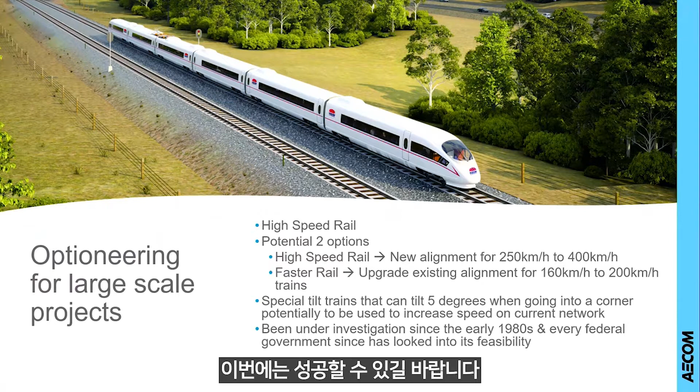The other option is faster rail, upgrading the existing alignment from 160k to 200k, which is likely the most interesting option. We're going to have special trains that will tilt more than 5 degrees in certain areas just to keep the speed. This project is a long life project - they've been talking about it since the 80s. Hopefully now it's going to go through.

So that's the picture of the workflow. Don't worry about that, I have a zoom of this workflow. If you take a look at the workflow, the idea is that we start from GIS data - we gather GIS data of the territory from the GIS guy.

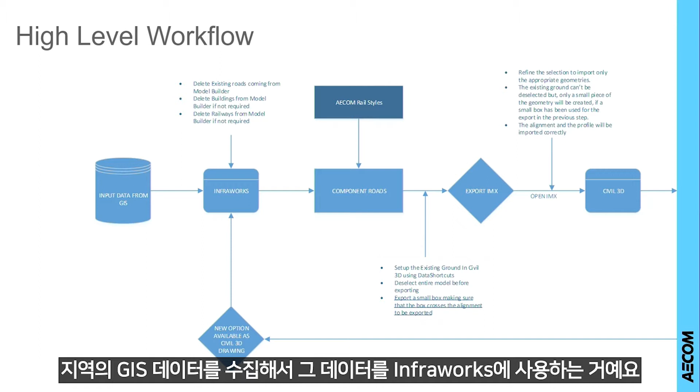Then we use that data in InfraWorks, using component roads in InfraWorks to fake the rails, because there's no rails in InfraWorks - well, we do have rails, but they are not component rails. So we developed some custom styles using custom components, but really we are faking a rail using a road.

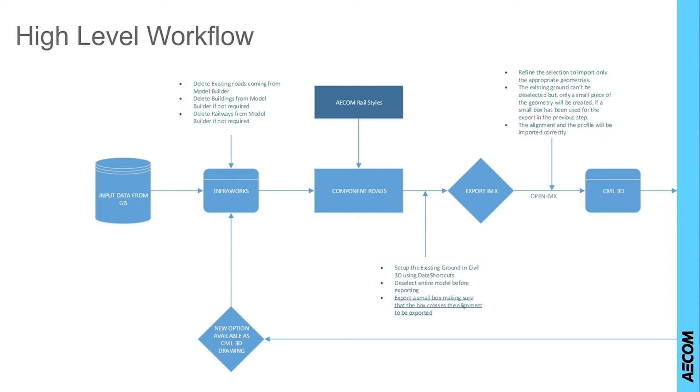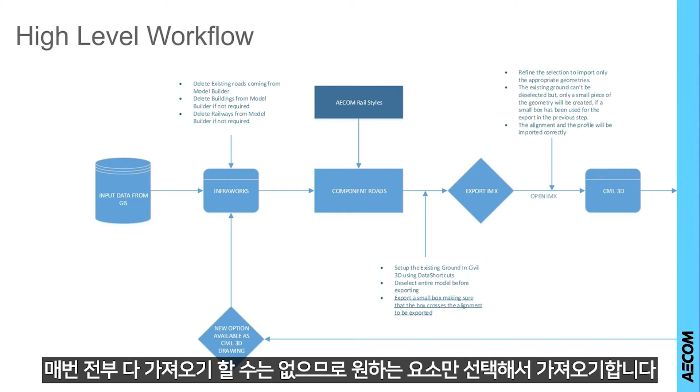Then we export that into an IMX. We've got custom templates based on customer requirements in Civil 3D that we use to import the IMX and quickly shape the look and feel of the drawings. Then we refine the selection of elements we want to import inside Civil 3D - we don't really want to import everything every time. So that's what we do when we open the IMX in Civil 3D.

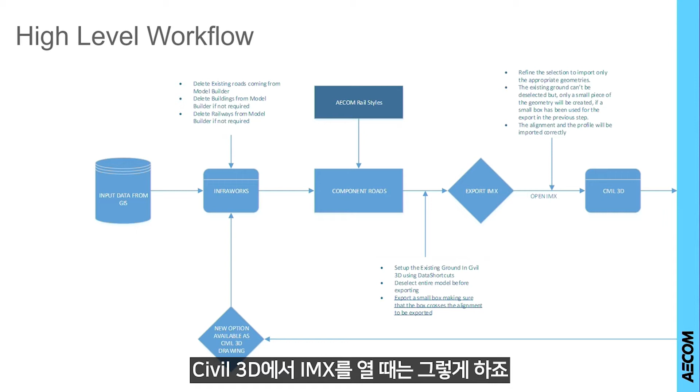And then, of course, when we are in Civil 3D, we start to leverage the power of data shortcuts to keep things lighter and at the same time dynamically connected. So we usually have a file with the geometries - alignments and profiles. Then we have another file with surfaces, another file with the corridors, and another file with the sheets.

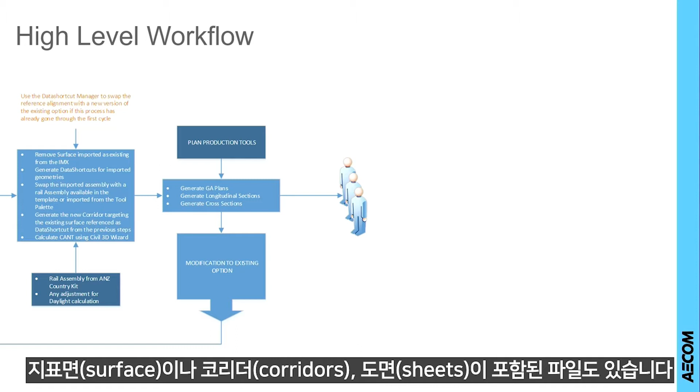So we try to keep things as much as possible separate. Also, because if we want to change something in the project, we don't want to open a file and wait for 20 minutes for the file to open.

In large data sets, you'll find that Civil 3D is creating also a local proxy geometry - if the file is more than 2 gigabytes, Civil 3D creates a local geometry. So every time you want to refresh that geometry, it's just a nightmare. And if that file is sitting in ProjectWise, it's even worse, because it's going to pull all the information from ProjectWise, and you literally wait 20 minutes before the drawing opens.

But we try to minimize this issue by splitting the model as much as possible, finding a tangent point, for example, where we can split the model on a straight stretch, both vertical and horizontal. Then at that point we start another one. We found that more or less 7 kilometers is the right range in Civil 3D to keep things pretty good. This project is 240K, so you can multiply the number of models, drawings, and things we have to keep track of - but they work. At the end of the day, they work, so that's good.

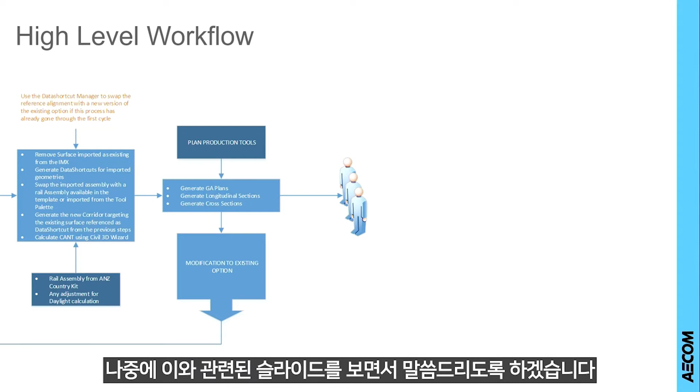You probably heard about this - the data shortcuts can sit in BIM 360. I have a slide, I'll talk about that a bit later.

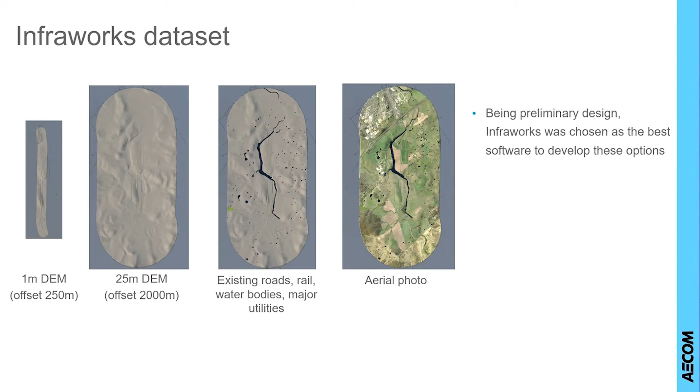So that's more or less where we start. As I said, we gather information from the GIS guy, trying to have different... we asked the GIS guy to provide us with different DEMs, some of them at 1 meter, very close to the alignment. 250 meters is the buffer we usually use for the 1 meter resolution. Up to 2 kilometers, we use 25 meters. And then we gather all the information about the water area, and also the aerial information.

So we have different options at AECOM - we have an enterprise business agreement with Bentley and Autodesk at the same time. Of course, we also looked at Concept Station, which is the same product coming from Bentley. I have to say that at the moment, the majority of the geometry design is done in Bentley. We're trying to shift this to an Autodesk solution, but the designers still prefer MX internally to do the geometry design. So we chose to use InfraWorks in this project just to demonstrate that we can do it.

We already had a GIS portal where we have all the client information, so we used that to gather all the information we need.

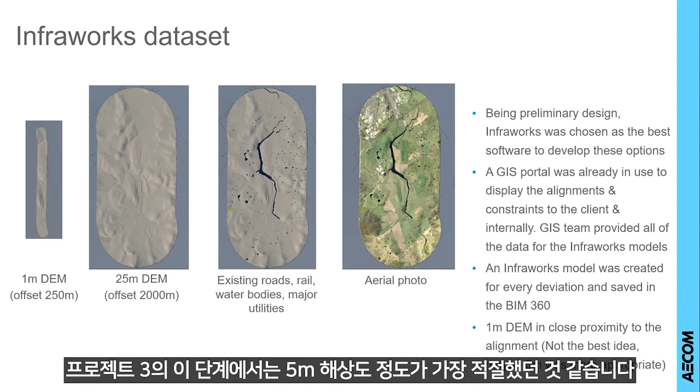An InfraWorks model was created and published to BIM 360 just to share the information with the client, literally in real time. At the end of the project, as a lesson learned, we understood that probably 1 meter is too much, it kept the file really high, really big and heavy. Probably 5 meters was most appropriate for this phase of the project. So that's good, this is the good guy.

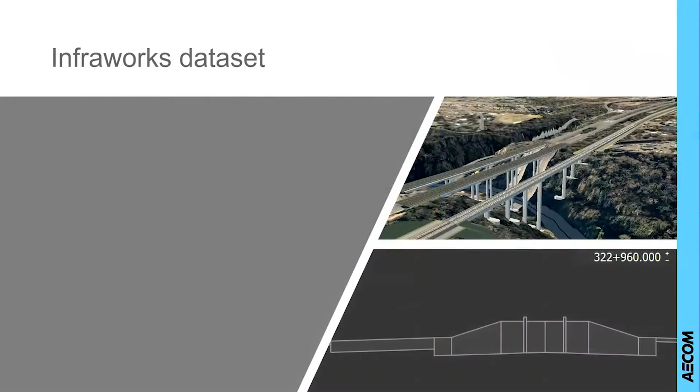So the InfraWorks dataset, this one is exactly the example of the component roads used for the rail design. Generally it's very easy to use InfraWorks. We have internal trainings that run for probably 2 days, the basic one, so people can start to use InfraWorks very quickly. They look pretty, so it's a very nice visualization in just a couple of hours.

The bridges are really powerful in InfraWorks, and our bridge engineers are starting now to use the bridge design inside InfraWorks as a very quick optioneering. Again, we have the option in Bentley, but we just like the way InfraWorks is doing it.

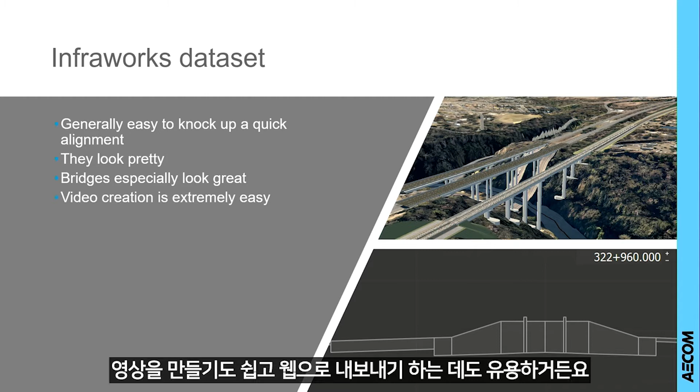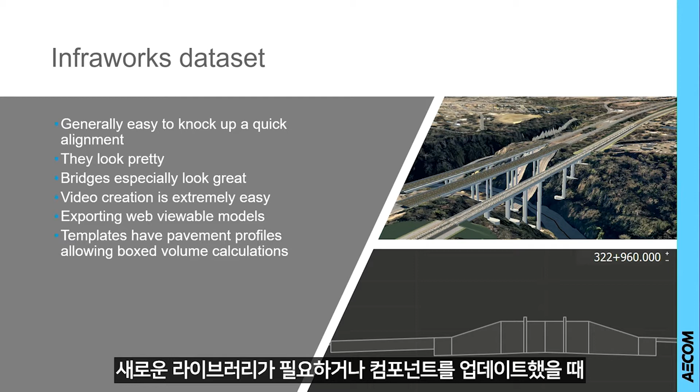It's very easy to create video, and it's very useful to be able to export that to web. Then we can push to the designers whenever we need a new library or we update the library of components. We just push it through the night, during the night, to all the designers so they can get it the day after. So that's good.

But now comes the bad. The speed — we found that InfraWorks sometimes is really slow. To be able to use a large dataset, you have to really tweak things as much as possible.

So we had to split not only the Civil 3D models, but we had to split the InfraWorks model as well. So we had probably about 50 different InfraWorks models connected to different projects in Civil 3D. That was the idea we found, and it is probably the best approach.

10 kilometers already started to struggle in InfraWorks, so you have to keep it less than 10 kilometers. It depends on the complexity, but more or less it's a rule of thumb.

We had a 30K option which we couldn't really split for design reasons, and that's my designer working on that model. It was literally crashing the computer every probably 20 minutes, so it was really angry.

We had to open the windows, even though we can't really do it because we are in a tower, because the CPU or fan were just burning the computer.

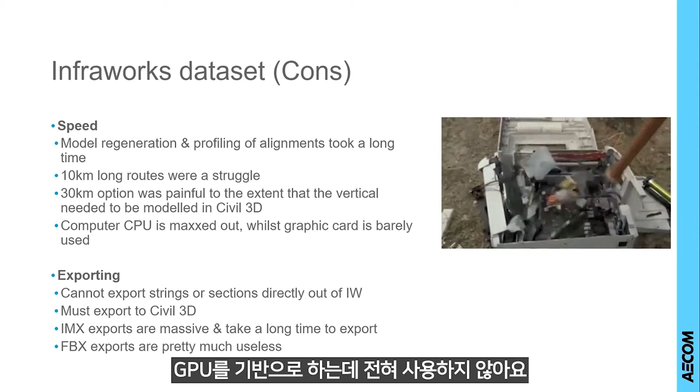Civil 3D, InfraWorks, it's card enabled, but doesn't use the card as much as we would like to. That's one of the biggest issues of InfraWorks. It's all based on GPU, but it doesn't use it at all. We don't know why, so we try to investigate that as well.

Exporting — we cannot really export sections from InfraWorks. It's not bidirectional yet between Civil 3D and InfraWorks. That's a big issue.

Sometimes we had to use FBX, which is just a stupid format. It's not a real BIM format, there's no information in the FBX. So sometimes we just decided to optioneer it directly in Civil 3D because of this reason. And the 30K, at the end, we just decided to move it into Civil 3D without using InfraWorks.

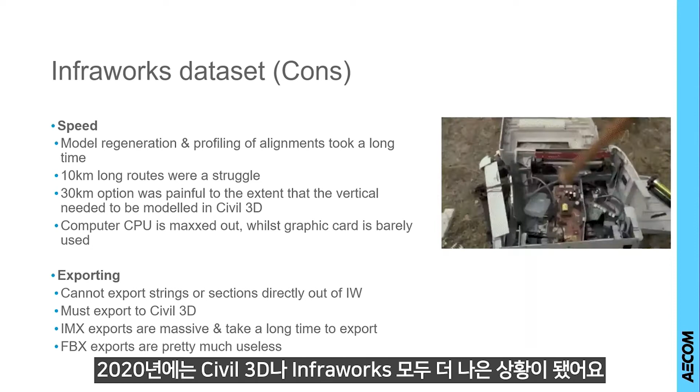Things are slightly better now — this is based on 2019, and 2020 is slightly better, both for Civil 3D and InfraWorks. So we're trying to give it a go again on the same project, and it seems to be going better now. That's bad, so for me, that's bad, really.

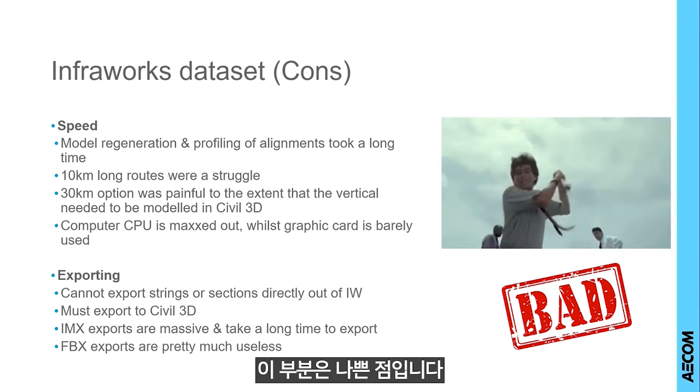So how to tweak the performance setup? I'll try to give you some tips and tricks. I don't know how familiar you are with InfraWorks, but there's a very nice feature here, this delayed road regeneration. We found if you tick that box, whenever you change the alignment both horizontally and vertically, it doesn't refresh immediately the road in 3D unless you click outside of the window.

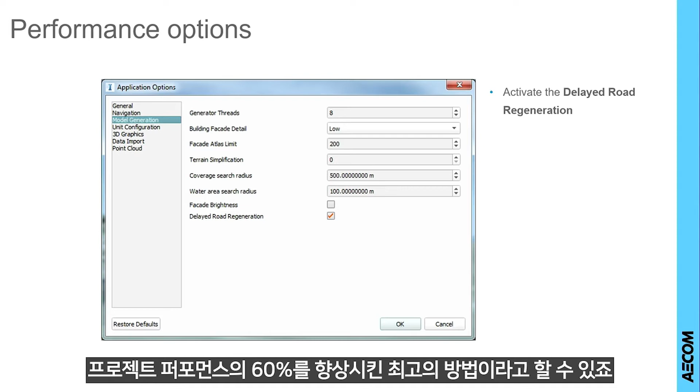That's good because the designer can tweak it in the profile view or the plan view, and then when he's happy with the option, he can click outside and regenerate the road. If you try to regenerate every time for 6 kilometers, 10 kilometers, 30K, it's just a nightmare. That's probably one of the best things we found to improve, by about 60%, the performance of a single project.

Make sure that you always use optimize for speed as an option, and if you have a GPU-enabled card, most of us will have probably an NVIDIA card, just make sure you add InfraWorks in the program settings as software that is GPU enabled. This will increase performance another 10 to 50% when you use the model. It still doesn't use the full GPU power, but it will increase the performance.

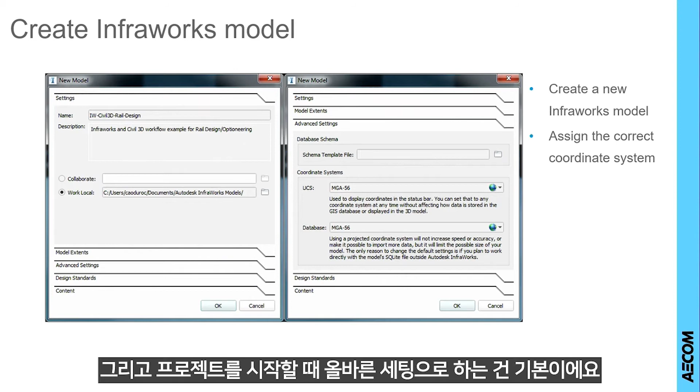You always start your project with the proper project setup. So how do we optioneer in InfraWorks? We import the raster image. I'll go quickly through this, you'll find it all, and I'll share the link to download everything plus the handout and everything else. So we import the raster image.

Then after we import the raster image, we quickly start optioneering with the options. The DEM will create the existing surface, and InfraWorks is very quick to do the optioneering part of the design. Unfortunately, we have to use the road because otherwise we don't have the rules to design the horizontal and vertical geometry if we want to use the rail, because it's not a component.

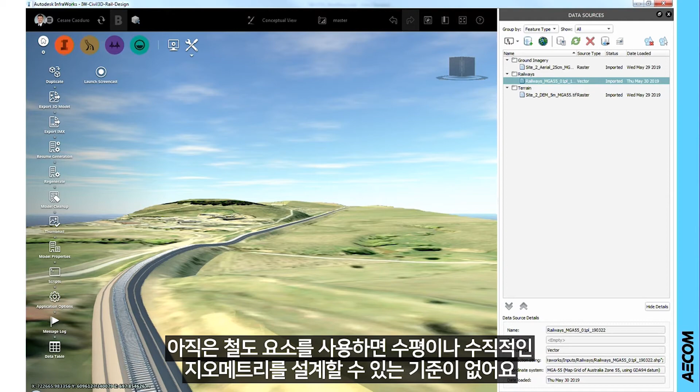So we go further. As I said, we have a couple of custom components which we push as a custom library. It's really simple: you create a shapefile in CAD, and that shapefile can become a component in InfraWorks for both the rails and the sleepers. Then we just create a simple texture that we apply on top. It's very quick and it works really well. We don't really need the full detailed 3D of the rail, we just need to show the client that it's a rail.

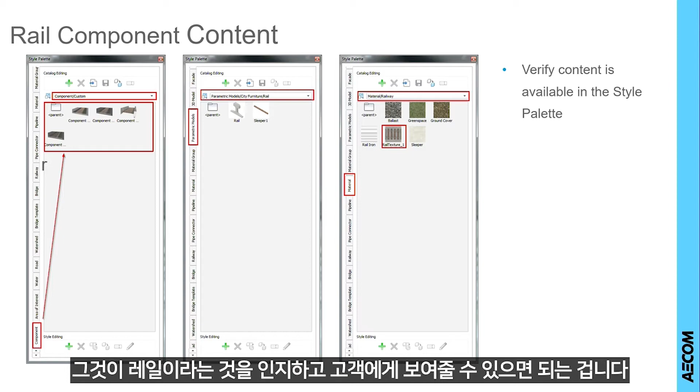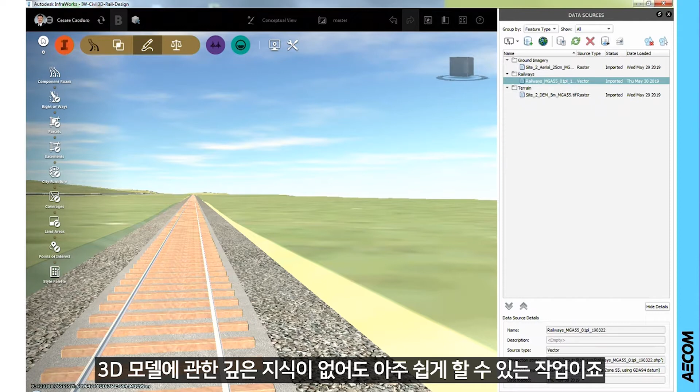It doesn't matter if it's a road, we like to fake things with the client. So then you can leverage the power, you can start optioneering using component roads to do that. You can start to input your dimensions, it's very, very easy to implement, and that's the final result. It's not very high level as you might expect, but this is done in probably less than an hour, so engineers can really go into that and do it without any knowledge about 3D modeling.

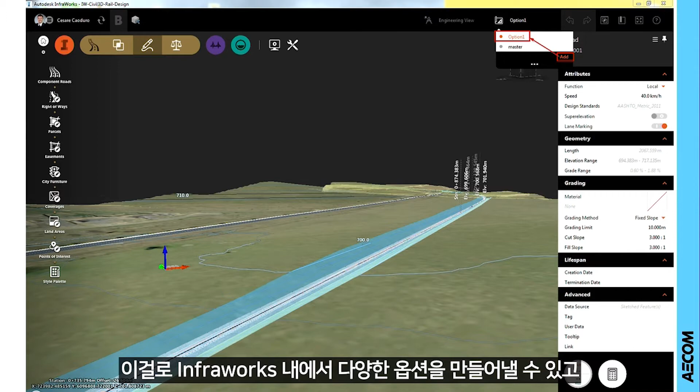Then you can show the profile view, and again you can start to do the vertical profile, which you can't do if you use the rail object. Using that, you create your different options inside InfraWorks, and then that's the time you go into Civil 3D.

So we've got RMS, Road and Maritime, and something else - government authorities in New South Wales - so we've got customized templates. The trick I want to give you here is that we use referencing templates inside the master template.

So how many of you know about referencing templates in Civil 3D? Okay, quite a few, but not everyone. That's probably the most powerful thing inside Civil 3D.

You can create a master template, and then create other templates on top of the master template, and just reference those templates like an XREF, like drawings, but it's a template. What you can do is swap templates whenever you want. So if you want to show the drainage, you have a template for drainage referenced in the master template, and whenever you want to show the pavement, you have a template for pavement, and you swap it. So you always have the same master model, but you swap just the initial template and start to produce drawings. You don't have to create different sets of drawings, you just create different sets of templates and swap them as you need.

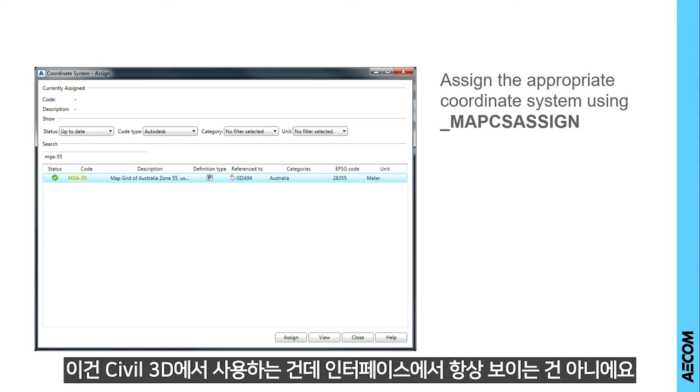Of course, you have to set the same coordinate system. We use this command in Civil 3D, it's just not always visible in the interface. I don't know why there's not a push button there to set the coordinate system, so we usually type this one in. I have it written on my desktop because I always forget - I had to Google it every time, so now I have a sticky note.

Then you start to set up your data shortcut profile. Until now, we used to set up the data shortcuts to point to ProjectWise, and I have to say that is a nightmare. It's a nightmare because ProjectWise is very slow in managing data shortcuts, and you can't use versioning control for them. We were pushing Autodesk for ages to introduce BIM 360 integration for data shortcuts, and thank God it's now available.

So you can set up your data shortcuts in your BIM 360 project, which is perfect. You can generate revisioning for data shortcuts. It's the same exact process you'd use for a desktop setup, but you set that up in a BIM 360 project using the desktop connector. If you have the desktop connector installed, you just find your network drive pointing to BIM 360, and then set up your data shortcuts on that.

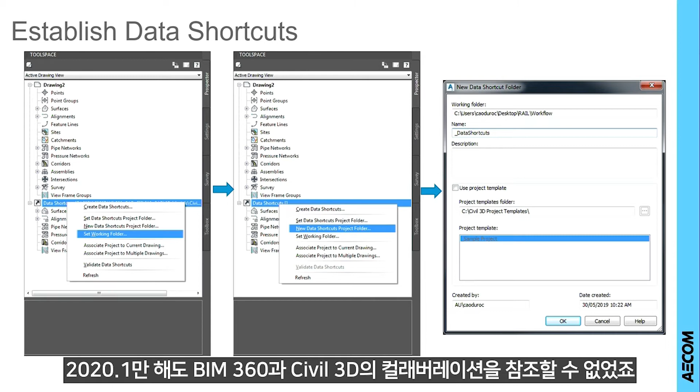Before that, even in 2020.1, it's not possible to reference BIM 360 collaboration for Civil 3D. So if you have an old project and want to use that, you unfortunately have to upgrade the project, which is not the case for most projects already started. But if you start a new project now, yes, you can do it.

We don't have a data center in Australia, so our closest data center is in the US. I found the performance still isn't quite good because we have to connect to the US. But if you're in EMEA or in the US, the performance is like writing on your desktop machine. That's another reason we can't really use BIM 360 too much for these projects - there's regulation about where the data is stored. If it's stored outside Australia, we can't use it for government or defense projects.

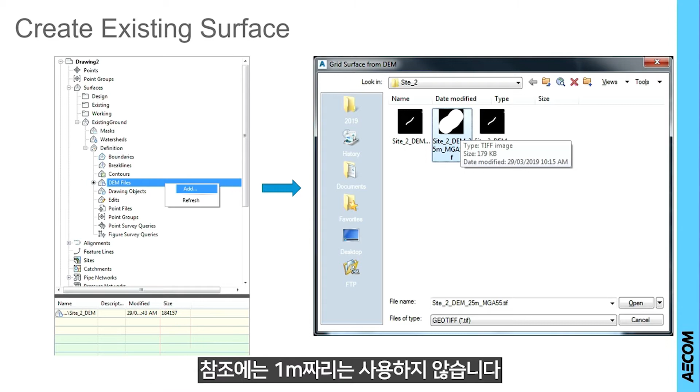But for internal optioneering, yes, we can do it. So we use this one to try to up-rev this project and understand what we can gain from it. Then, of course, you create the existing surface like you normally would, then reference the DEM file - the different DEM file depending on the type of information you want to gather. We usually don't use the 1 meter one if we just want a reference, and that's the kind of result you get.

Then we reference the aerial photo. The difference between a simple picture and GIS data is that you can't use an XREF - you have to use map insert because it's a GIS georeferenced image. You have to use map insert to be able to place the image exactly in its location. You can't really move that image because it's georeferenced.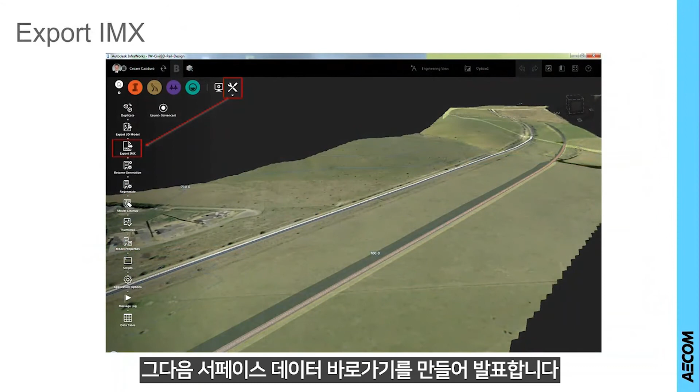So then you create the data shortcut for that surface, and that's published. You go back to InfraWorks and export the IMX. Of course, you don't want to export the entire project, just something specific. The trick here is you don't have to create a box for the whole area if you want to export the entire alignment - you can just create a small box, but make sure it crosses all the elements you want exported in the IMX. That creates a small box, so less calculation in terms of area, but because you crossed something, you'll still export the entire object at that time.

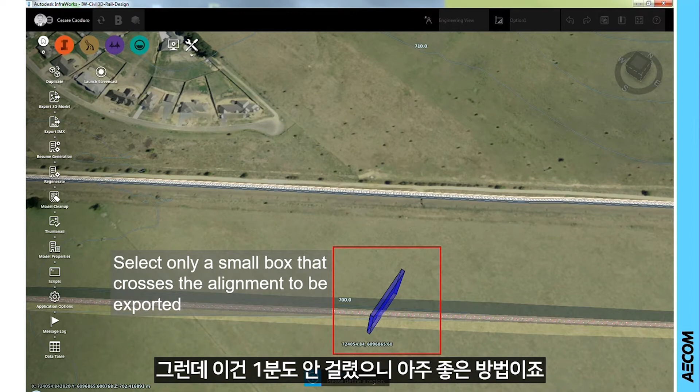This was a great improvement in terms of export, because at the beginning we were trying to export the entire area without using a box, or using a box for a very big area, and that took probably 10 minutes to prepare the model. With this trick, it's less than 1 minute - so it's a very good trick.

So you start then the Civil 3D production, importing the IMX inside the model that you just prepared. And you set the coordinates to match the InfraWorks one.

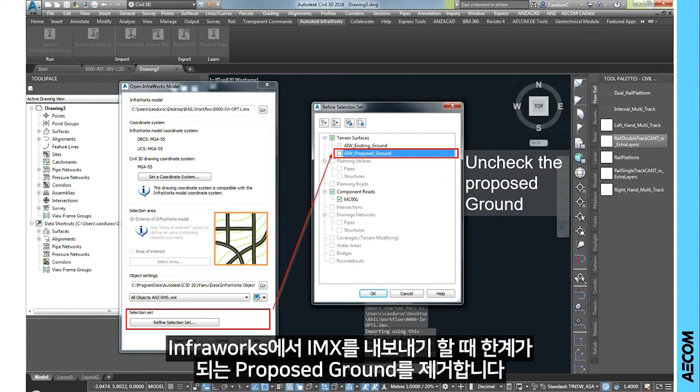And then you remove the proposed ground, because that's another limitation when you export the IMX from InfraWorks. You can't say, I don't want to export the ground. It will come up always even if you don't want to. So you always have to remove and uncheck this one every time you do it. They said they're going to fix it and give you the option to remove it when you export from InfraWorks, but at that time it wasn't available. Otherwise, it will just bring in again the surface that you have in InfraWorks, but you have that surface already created as a data shortcut in your model, so you don't really need it.

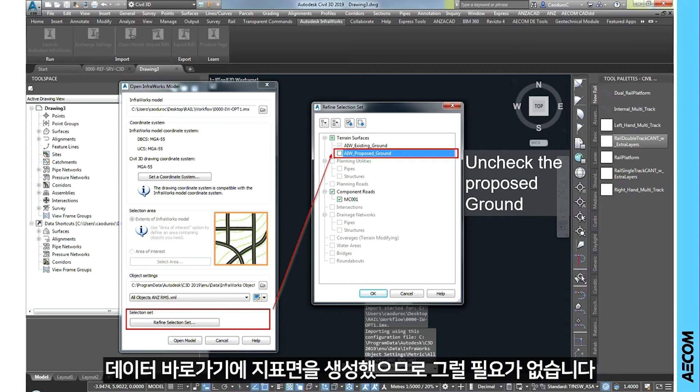So that's the result. It comes as an alignment. It comes with an assembly, which is the fake road corridor that we have created in InfraWorks. But that's not a rail, that's a road.

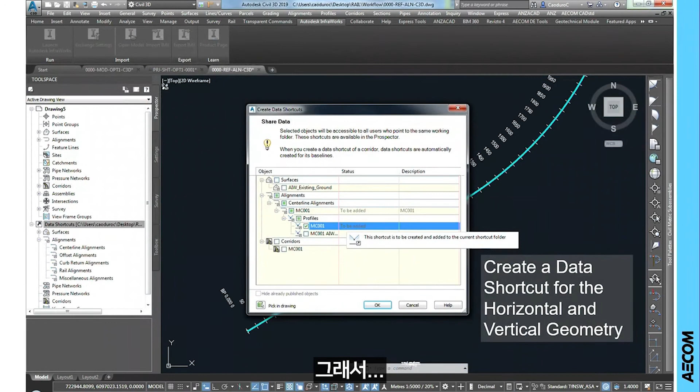So what we do, we create the data shortcuts for the alignment. We create a new drawing. And that's probably also another important thing in terms of performance. So when you reference a big surface inside another project, just make sure that you go under the settings before referencing that. You go under create surface reference, which is sitting under surface commands, create surface references, and make sure that you say you don't store the referenced surface in the drawing, but just keep it outside the drawing. That's another performance improvement when you have big projects.

That's yes by default, and it drives me nuts every time. So I actually created the template to remove that one. The out-of-the-box template comes with this one as a yes, so just remember to remove it from your template.

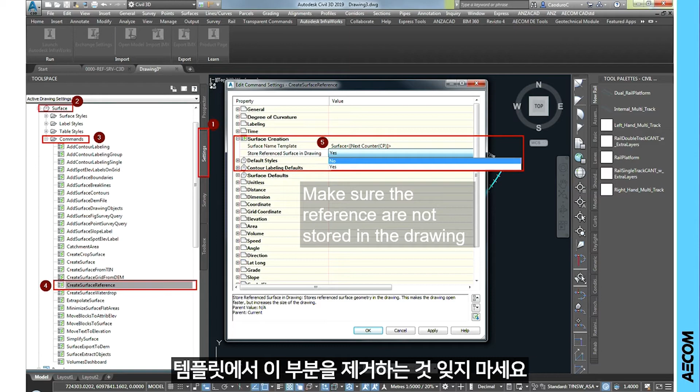So you reference the geometry, you reference the alignment, and then you start to create a new assembly, which is a rail now. But you can use the alignment by swapping the assembly. So you do a quick setup of the assembly.

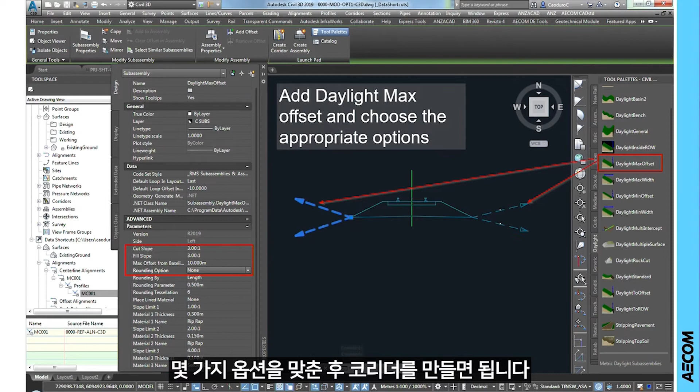It's already there out of the box. You just add the daylight, so the cut and fill for the cut and fill calculation. You do a couple of options there to match it, and then you create a corridor.

So you select the alignment, you select the profile. Both of them are coming from InfraWorks. You select the new rail assembly, and then you rebuild the corridor. And boom, that's the result.

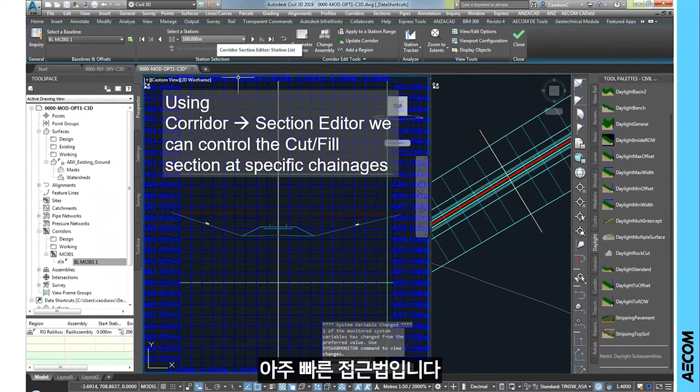So this one takes from the moment you draft in InfraWorks to the moment that you have this one, literally probably less than 10 minutes. So you can script this with a plugin if you want, but even with a couple of clicks, it's really easy because we already have this in the library, in the tool palette. So it's just a matter of creating the data shortcuts the first time and then just swapping the assembly. It's really, really, really fast as an approach.

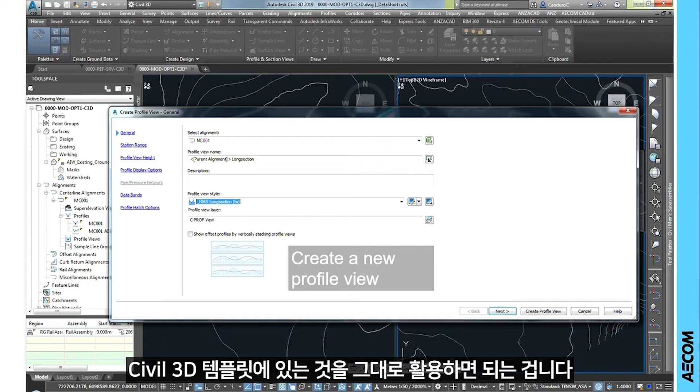Then you start to create your profile view. You make sure you want to have the existing ground together with your design profile. You create a new profile. Hopefully you already have a view style you want to apply. There's already out-of-the-box things in Civil 3D templates. Otherwise, you can have a country toolkit. Most of the regions already have a country toolkit. This one is part of the ANZ country toolkit. We just modified it slightly; it was already good.

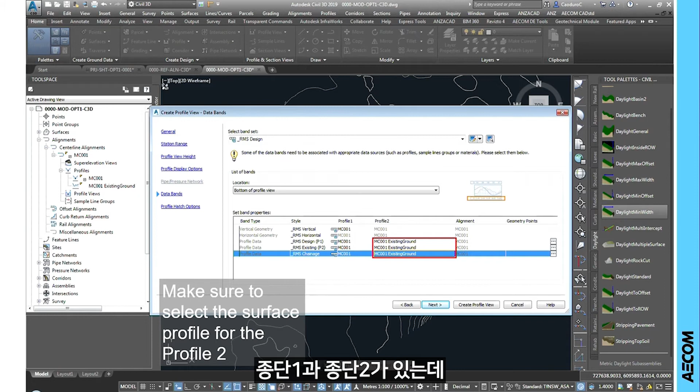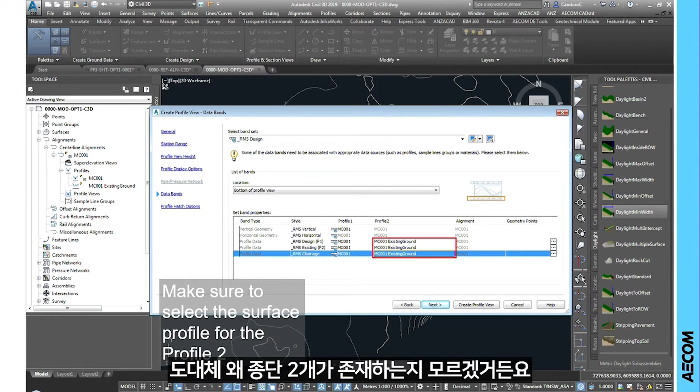That's probably another thing you have to make sure you check when you have an existing ground, because out of the box, as you can see, you have profile 1 and profile 2, and all of them are coming with the same object, the existing ground. But you really want to compare two profiles, the existing ground and the design profile. So just make sure to check always that you have as profile 2 the existing ground. That's another thing that drives me nuts, because I don't know why I have two profiles. I told you I want two profiles, and then you propose me just one profile. So it's just crazy. Anyway, so that's the result.

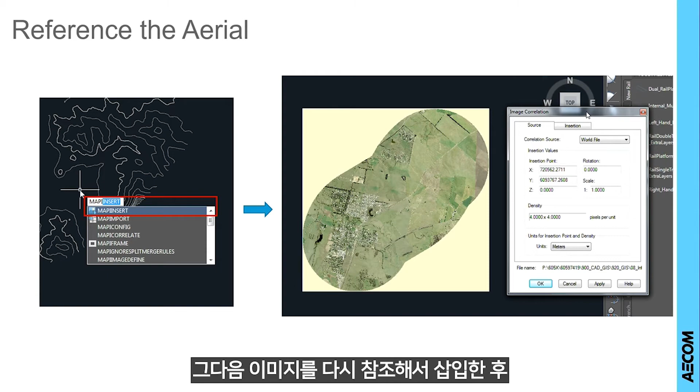Pretty quick, pretty easy. We can already have this printed out. But what we do, we insert again in this one. We reference again the images, and we prepare the model for drawing production. So because everything is cross-referenced as data shortcuts, whenever we change something, this gets updated. And that's the power of data shortcuts. So if you don't use data shortcuts, please start today to use data shortcuts.

There's plenty of classes in the previous AU where you can learn how to use data shortcuts or how to build sub-assemblies, for example, so I'm not going to dig into that. But it's a best practice to use data shortcuts as much as possible in Civil 3D.

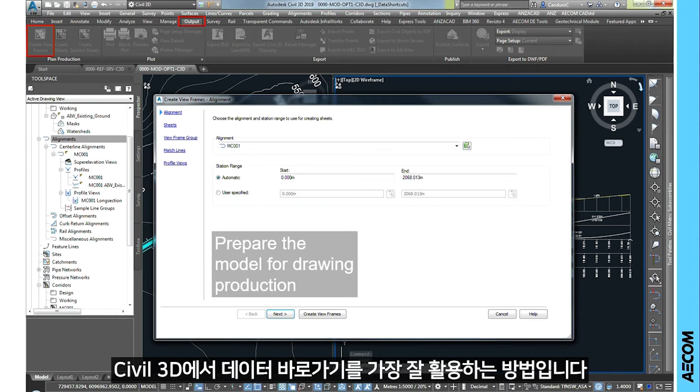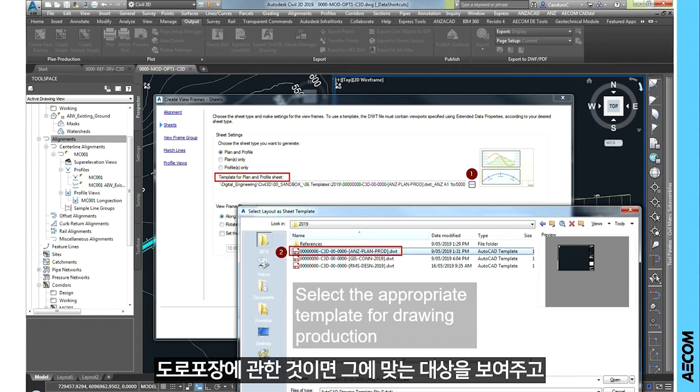We have a separate template for plan and profile. This one is also cross-referencing other templates because we want to shape the drawing based on the discipline we want to show. If it is a pavement, we want to show different objects. If it is a drainage, we want to show different objects.

Then you choose the size, which is coming inside the template. It's always good to provide a meaningful name to the view frame group because we try to link the view frame group to the option number, so we can always understand if we need to regenerate the drawings and find exactly the view frame we want to regenerate.

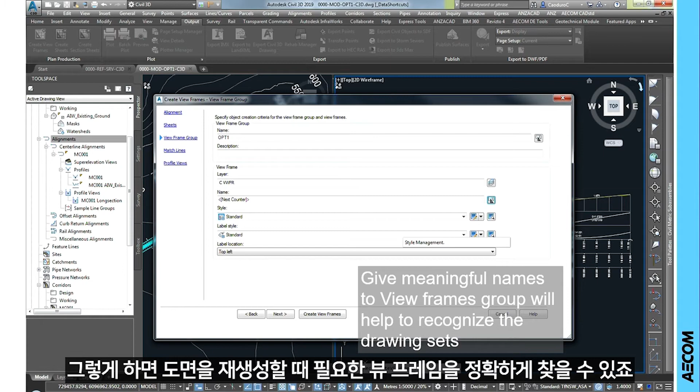Again, we select the band style, band set style, and you click on a specific point in the view. You choose the north.

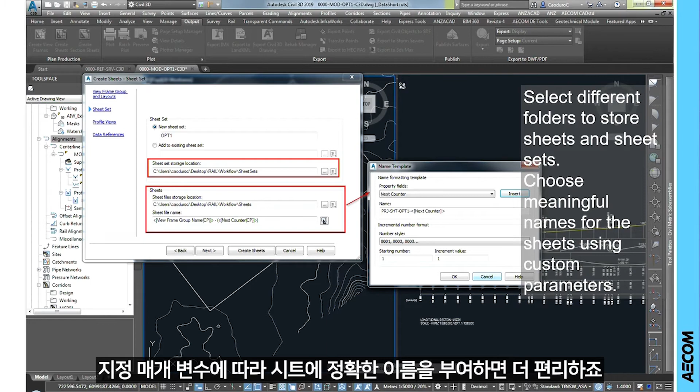You choose how you want to name properly your drawings. That's something people usually avoid, but we try to shape the name based on the name of the drawing because we save the drawing in ProjectWise, and that's what we want. We don't want to go to ProjectWise and just rename the sheets. We want the sheets coming already with the proper naming. That's another tip I want to give you.

Try not to choose the settings from an existing profile view. You know why? Because if you choose that option, remember that issue about the two profiles — it's going to get the same profile again. So go in the wizard and just choose the right profile you want to see in the drawings. If you choose the previous one, even though it looks correct, it's not going to get that option.

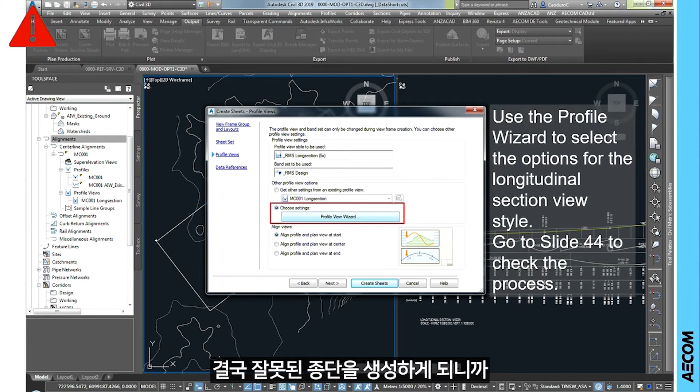So you will generate an incorrect drawing profile. Go always to the profile wizard. Then it's just a matter of whether you want to align the profile view at the center — it's based on the title block, really. You choose what you want, and then you generate the drawings, and that's the result.

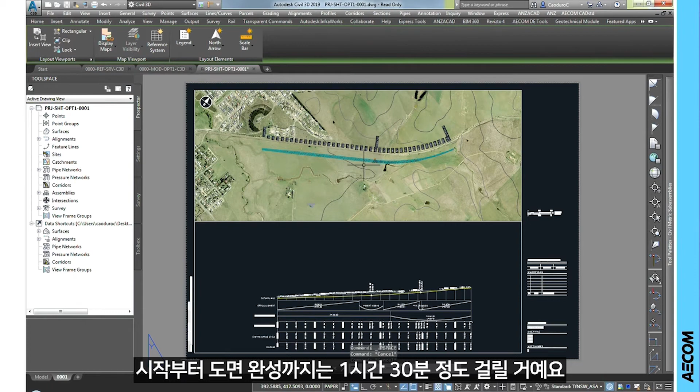Again, this task is about 10 to 15 minutes. It depends on the number of drawings. This one was just one, so it's probably 2 minutes. But if you have 10 or 15, it's going to take probably 10 to 15 minutes, mostly 1 minute per drawing. But from the beginning to the drawing production, it took probably an hour and a half. So it's really fast, really quick for optioneering.

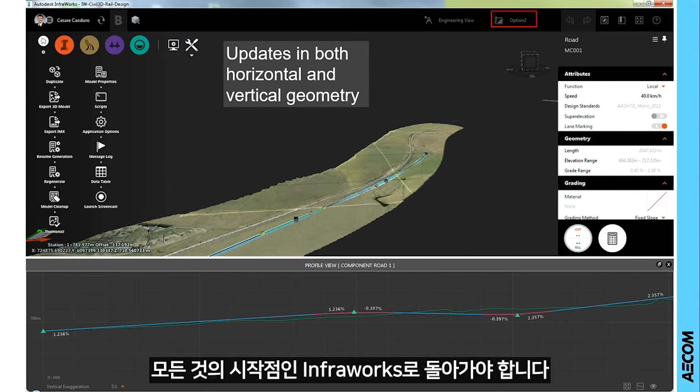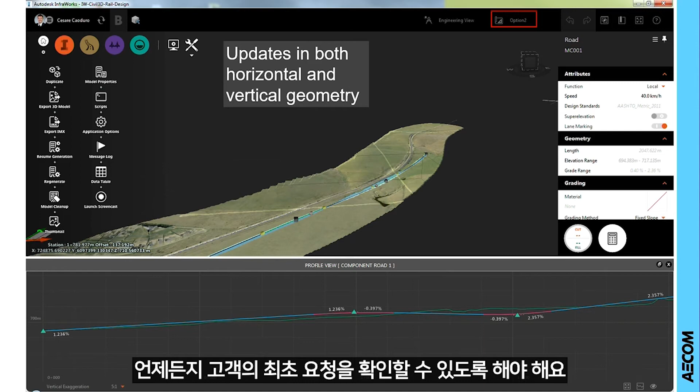So what if we have to update an option, which is the case every time? We go back to InfraWorks because that's where everything started. We generate a new option, and we try to keep that option in memory so we can always go back to what the client was asking the first time, and then we do exactly the same process.

We export again, we generate an option to IMX, and we go back into Civil 3D. Always remember to remove the proposed ground this time. Everything started exactly in the same way.

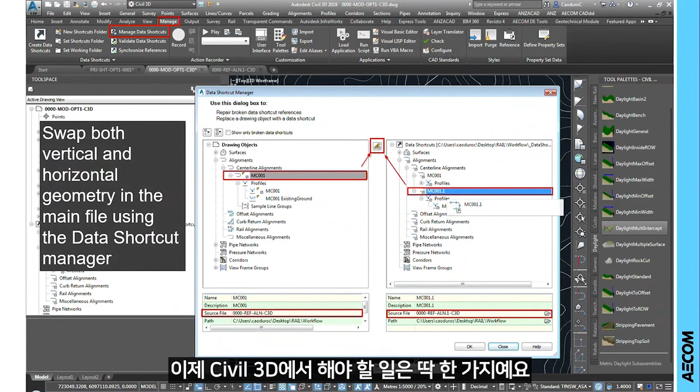The only thing you have to do in Civil 3D now that you have the second option is just go under Manage Data Shortcuts, and then swap the two profiles — the old profile with the new profile. It's just a matter of minutes again.

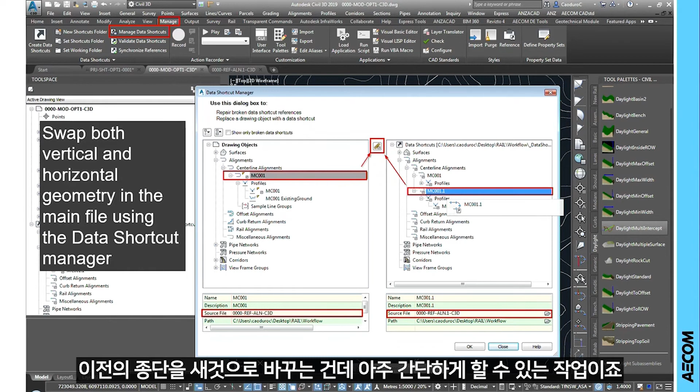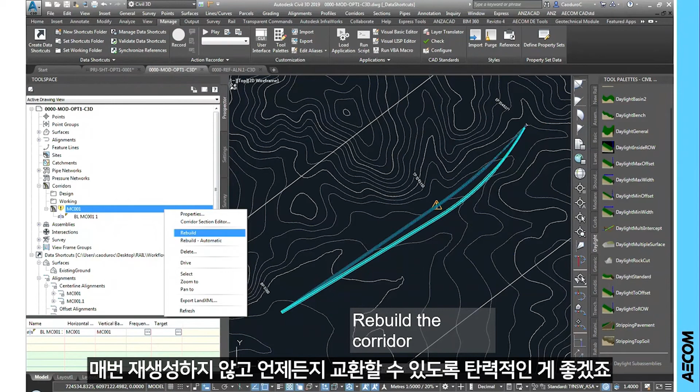That's the new option, that's the previous option, and then you just rebuild the corridor. I usually avoid having an automatic rebuild corridor, because if the corridor is really complicated, that will take time from your process. So it's all about trying to tweak the platform as much as possible to not regenerate every time, to be resilient, to swap things at any time, and just a few clicks to regenerate everything.

So this one is regenerated. We already had the assembly, and the long section is updated.

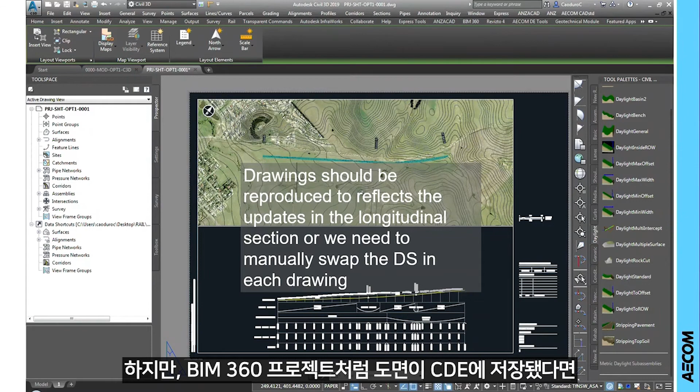And that's the bad thing. You have to regenerate the drawings, because even though the data shortcuts are coming through the drawing, they are not updated. So you have to regenerate the drawings. But if you have the drawings in any CDE, like ProjectWise or BIM 360, that will uprev, so you can always go back and get the previous set of drawings if you need to.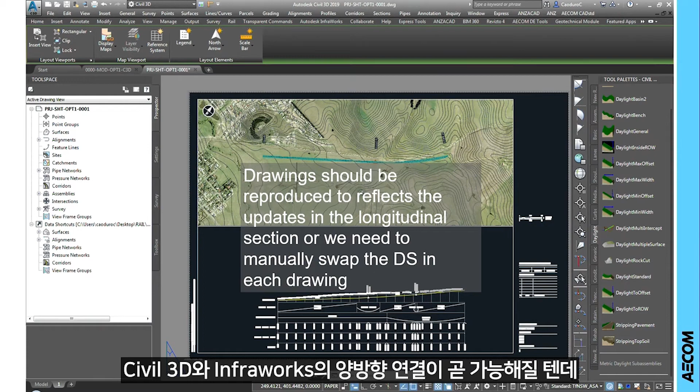So we asked for these features as well. It seems this feature is coming - they always say it's coming, of course. But yeah, it seems we're pretty close to having a bidirectional connection between Civil 3D and InfraWorks, so we don't have to export the IMX again. We can just link two projects and send information back and forth between them. And if we have a new option, we can choose to refresh the drawings without regenerating them, which is slightly different. So if now it's taking probably 40 minutes, the entire process is probably going to go to 30 or 25 minutes, which is amazing from a designer point of view.

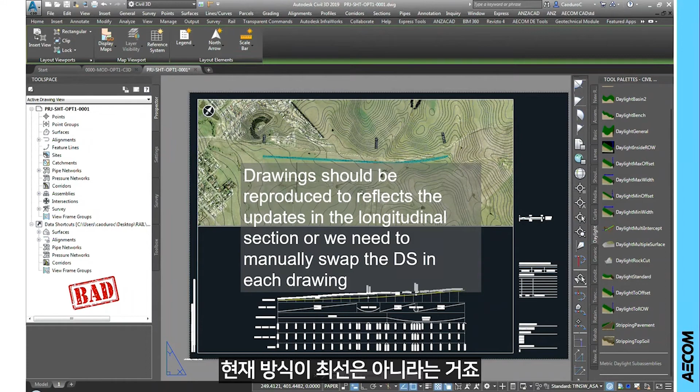That's bad, okay? So remember that this is probably not the best thing to do. So what's next now? All happy.

Dynamo in Civil 3D. So we have Dynamo in Civil 3D starting with 2020, and it is really powerful now because it opens lots of possibilities in terms of parametric design inside Civil 3D.

The bad thing for me is still AutoCAD - that's the problem with Civil 3D. So you can generate objects. We're using Dynamo for Civil 3D a lot now to place, for example, posts and signs, to create overhead wire structures for rail design, or just to place lighting fixtures for road design. So we use that a lot.

It's pretty powerful, but it's a 3D block - a 3D AutoCAD block. And even if it's a dynamic block, it doesn't really work that well. So we would like to have something more powerful, and that's the reason why we still do this kind of thing in Revit. We don't do it in Civil 3D for Dynamo.

Dynamo for Civil 3D, but it's really powerful. It all comes from a GitHub repository - it's an open source thing that you can go and customize as much as you want. We started to customize it, but then we decided it's not worth customizing because we want to do it another way.

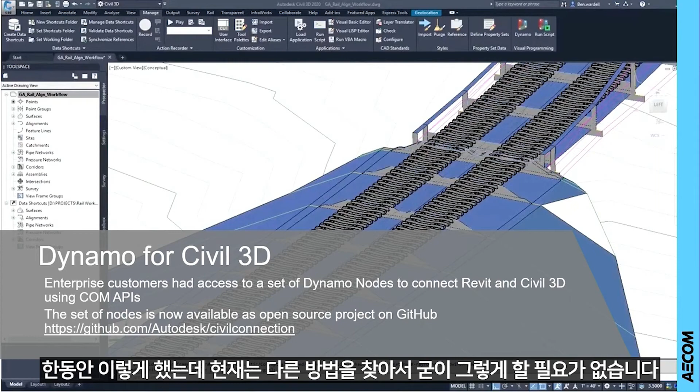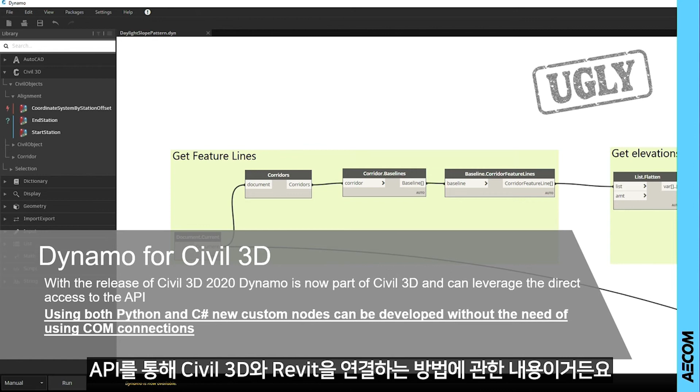That's why for me it's a bit ugly, because it's good, but not that good. It's good, but it's AutoCAD. So you can still customize everything like you would do in Revit, in Dynamo for Revit. You can use Python, you can use C# to create your custom nodes. And the good thing is you can access the API in Civil 3D directly, whereas if you want to access Civil 3D from Revit, you go through the COM API. If you want to know more about that, go and see my class from last year - I talk about how to connect Civil 3D and Revit using the API.

That's another ugly thing for me. So I already talked about using BIM 360 collaboration for Civil 3D now. It's a very good thing, but it's still not really performant. So it's not yet there, okay? It's good that they started to do it, but it's not yet there. So we're not going to use it in the next couple of projects - we'll probably wait another year before starting to use this collaboration for Civil 3D. And the reasons are that we can't really use it for government and defense projects at the moment. But it's good news.

As I said, you set the data shortcuts as you saw at the beginning of the presentation. You just need to go and find your BIM 360 through the desktop connector. Make sure you update both Civil 3D and the desktop connector, because if you update only Civil 3D and not the desktop connector, it's not going to work. So latest version of Civil 3D, latest version of desktop connector. Again, very difficult for enterprises because we usually roll over the software every 2 months, every 6 months, depending on the testing process.

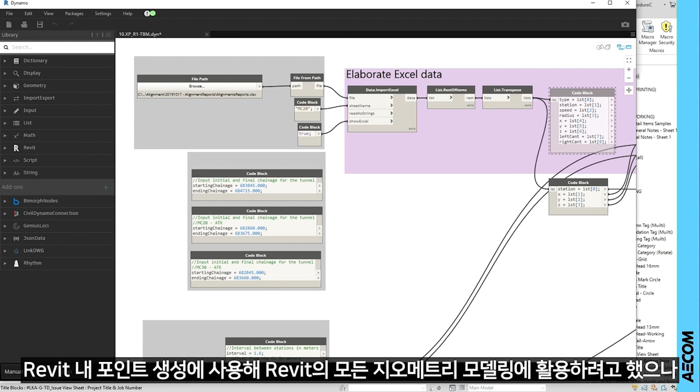That's another screenshot of Dynamo, this time inside Revit, and that's what we are trying to customize at the moment. So at the beginning, we were trying to use some import/export, classical alignment export, X, Y and Z, and then use that to create the points inside Revit, using that to drive all the geometry modeling inside Revit. But we found it's not very performant because you have to ask the designer to export a report for you and then use that report, not knowing which one is the latest one. So we started to customize our own nodes using C# and writing some custom nodes.

We just started to see what we really want about the alignment. We want to know the stations, we want to know X and Y, we want to draw the curve immediately inside Revit, we want to have the profiles.

If they change something, I want that now, not tomorrow when the designer is able to export the report, save it somewhere, and maybe send you an email. I want to connect immediately to that project and get the latest information. If there's an update, I want to know which one, so I can track the differences between the two.

There's a bunch of nodes we developed to try to understand if there is a difference between the two alignments. Those are some examples. Specifically, we use this approach with adaptive components. How many of you are aware of adaptive components in Revit?

That's bad. I'm going to add another one here for bad. So make sure you go now and try to understand what adaptive components are, because that's the most powerful thing inside Revit. Everyone says Revit is not for civil infrastructure - that's probably right. Everyone says you can't create very complex shapes in Revit - that's not true, and those images are the results.

So you can see this is a very complex cross passage. There's a TBM tunnel, there's a cavern, a mine cavern. This one is a cross passage, and that's a very high parametric cross passage that can cut anything it's connected to, can be cut from anything it's connected to, can change shape based on what it's connected to. It's just one family with a bunch of parameters, not that much really, considering the complexity.

I call this one the spider because it's based on 4 points. You place these 4 points on the alignment, and based on the two alignments, it drives the vertical and horizontal direction of the cross passage, making sure the cross passage openings are always square to the alignment, not depending on the real location of the cross passage. It reports the chainage and lots of other information.

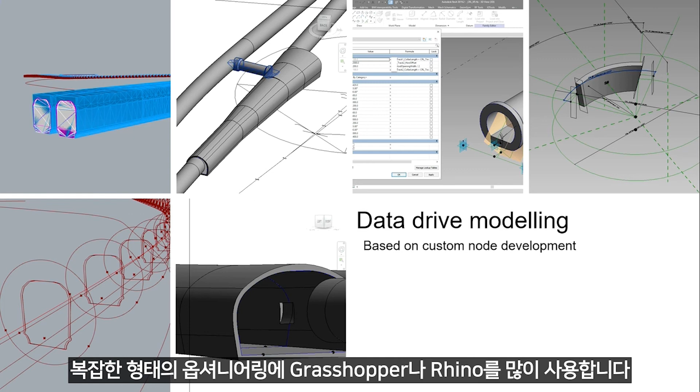So we largely use Grasshopper and Rhino as well sometimes to optioneer complex shapes, but that doesn't mean you can't do it in Dynamo. It just depends on the workflow we're using on that specific project.

And this, for example, is an example of the kinematic envelope creation, which is just the swept envelope of the train depending on the cant in the curve. We use that for coordination purposes and space proofing.

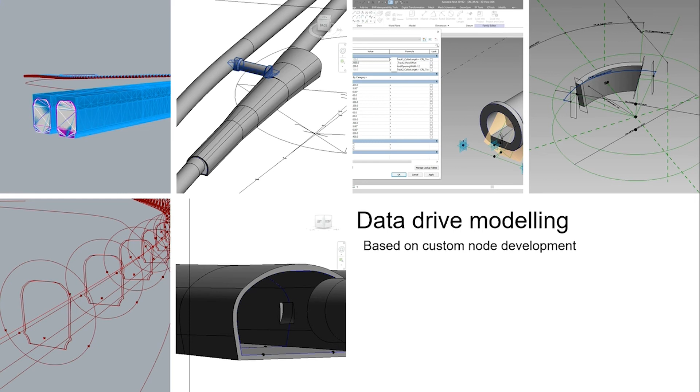But the process we use for Grasshopper is the same we use for Dynamo. In fact, we have the same libraries built both for Grasshopper and for Dynamo. So depending on who the designer is - if they're more comfortable with Dynamo, they have the same tools in Dynamo; if more comfortable in Grasshopper, we use Grasshopper.

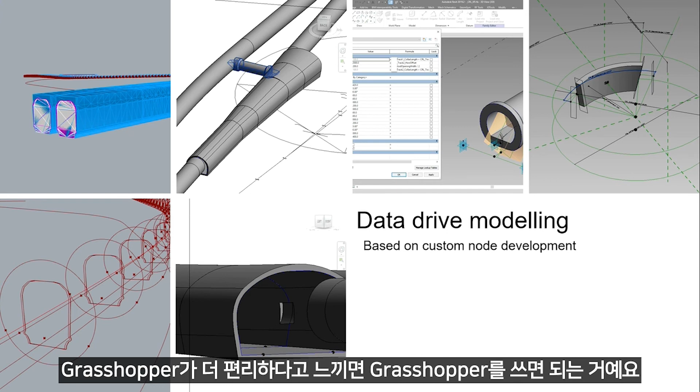The good thing about this is that when you create a piece of code that is good enough for Dynamo, it's good enough for Grasshopper, and good enough if you want to create a plugin for Revit. So the same piece of code can be used for multiple platforms - it's just the first part that slightly changes depending on the platform.

That's good, because when we prototype something, we usually prototype it for one platform, and then we use the same code inside other platforms as well.